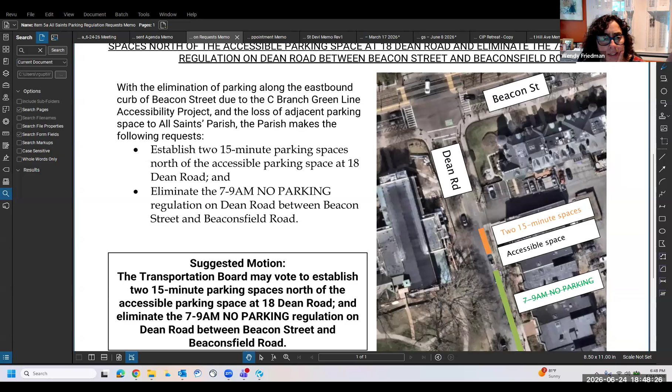I mean, I just know this is like a real, so right where you're proposing, it's still one lane. It's south of when the turn lane starts. Correct, yeah, and we're proposing the 7 to 9 a.m. no parking. It comes down here to Beaconsfield Road, and this is where we would propose that prohibition is just, it ends, because that's only where it exists.

I mean, I think if you haven't, and it sounds like you haven't, somebody should probably go look at that area in this time frame before we remove something. Thank you, Wendy. Richard, go ahead please.

Two questions. Did we consider the two 15-minute parking spots before the accessible parking location, making sure that we have two lanes of traffic into that intersection? And then, do we have any daytime parking permits for these abutters along here that have permission to park there all day with the permits, if they have it?

To your first point, Richard, I'm pretty sure that where it's marked as two 15-minute spaces, that is just parking today. So cars do park there today.

Well yeah, okay. I don't think there's any permits on this neighborhood for the Runkle School, and looking on Street View, it doesn't look like it. Maybe some resident permits, but we didn't check how many are issued. But right, do those resident permits allow parking between 7 and 9? It would not. Yeah, I didn't think so.

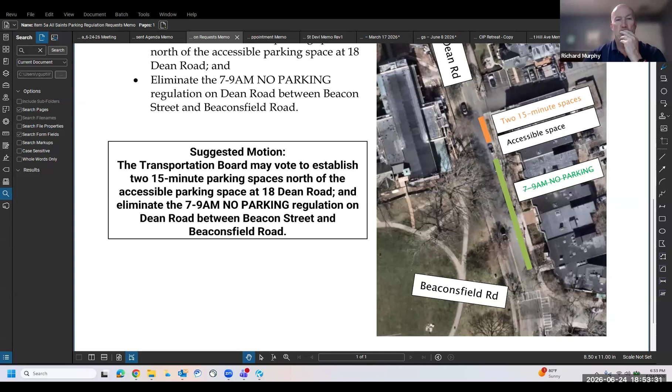Okay, but I think that if we were - I'm just answering Wendy's question. I thought you said to the contrary before. Let's pull up the street view so everybody can see the same image. Thank you, Dan, good idea. Have it ready - then I had a different comment, Brian. We'll get back to you, Jesse. Don't worry, yeah, I was just answering Wendy's question. I appreciate that.

Sure, this is the street view. This is the accessible space we're talking about here. And this is where the two 15-minute spaces would be. And then this is the no parking here to corner. So this is where we're proposing the two 15-minute spaces - so they're not new spaces. And then the 7 to 9 restriction is after the accessible parking, so these two are already in place as parking in the morning.

Okay, Jesse, why don't you go ahead, please? Yeah, I just wanted to follow up on your comment, Brian. As a resident south of there who travels that way quite frequently, the confluence of it - if it was to be allowed to park between 7 and 9, which would fill up basically with people commuting as well - then that conflated with the no turn on red that stops people from being able to drain off. The backup, as you say, today when it gets the worst, it's been up to Fisher Avenue in the morning.

And also keep in mind that there's a police officer directing traffic at Clinton and Dean from around 7:15 till 8 o'clock. He'll allow more cars to go through until they back up past Clark and then wait. But those cars can't move for a long period of time, because once there are 4 to 5 cars in the center lane of Dean approaching north to the light, any cars parked on the right-hand side block anyone from being able to get into the no turn on red lane.

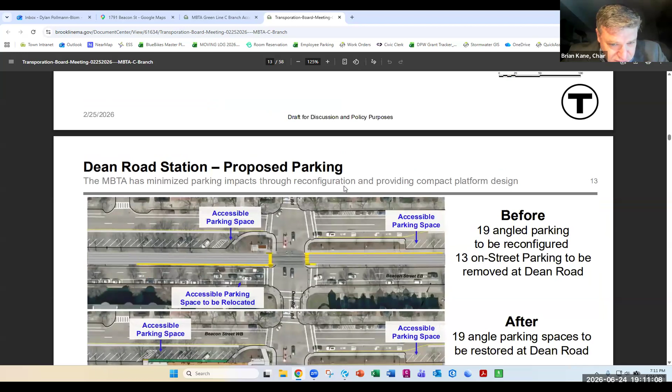Is this the one we're looking at? Yeah, this is what's approved. So the parking in front of the station there had to be removed to widen the platform. Okay, so long-term, there'll be an accessible spot put on Beacon eastbound on the far side of Dean, going inbound.

And then another one on the other side of the street, probably won't help too much. Looks like - is that little blue car thing the furthest spot back on Beacon headed towards Cleveland Circle, or is that... Probably the first white car that's parked, Brian. If not that, the second. 1791 Beacon? Okay, how far back is that? Probably right where it says 2026 in the corner. Okay.

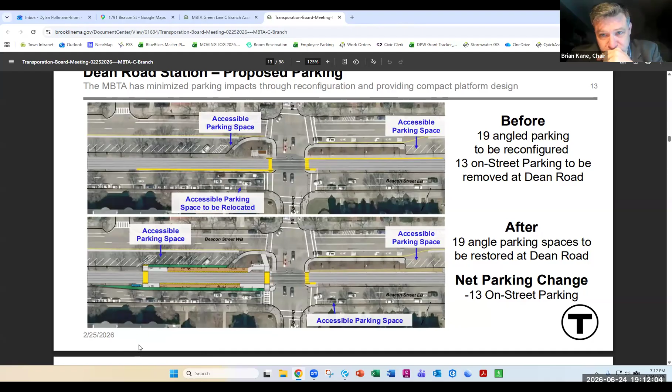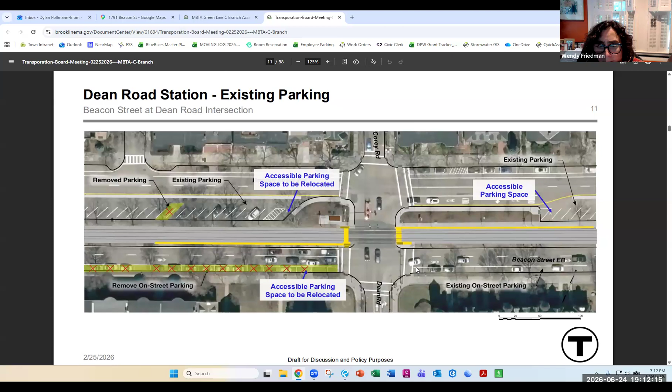Can you go back up to the before slide again? So it's one space that's moved over? And then lost - this one was here and it's going to be moved over here in the final condition. And the accessible space in front was shifted to the far side of the intersection, shifted over here. Okay, and then all those other spaces are lost. Got it.

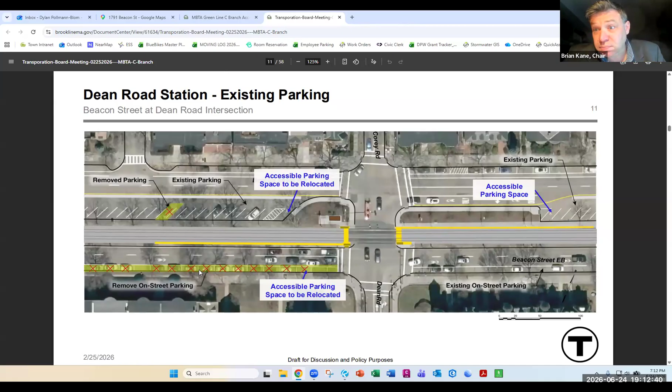So Reverend, or Roberta, I hate to put you on the spot, but can you put that back up? Dylan, trying to find a good compromise here. Would the 15-minute spots on Beacon Street, in front of where that new accessible spot would be, help at least for the short term while we figure out a longer term solution?

I'm not sure which accessible spot you're referring to. Right where that cursor is, on the far side of Dean Road on Beacon Street going inbound, at the bottom of the page. I think if that works better for you all, it's essentially the same as having the loading zone 15-minute on Dean Road. But if this helps with traffic flow on Dean Road, people will still have to cross Dean in order to get things to the church.

My concerns, Reverend, are that I think we have a little more homework to do on this. I want to find a short-term solution that might at least mitigate some of the effects for you folks over the summer. I hear how busy your building is, and I honestly didn't know it was that busy. So congrats on running an awesome program or series of programs.

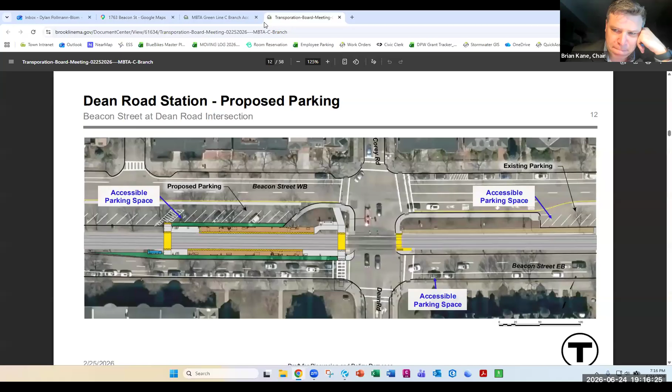That's not a bad idea. Dan, we've already approved the accessible spot at that location, I think by virtue of our vote on the MBTA thing. So do we know if that's in place yet or not? The MBTA is working on installing it. They haven't done it yet. So it's not installed yet?

Not yet. Okay, so in the interim, theoretically, could you go out there with temporary signage and make it accessible to help these folks out? Yes, we can. We're also trying to get a concrete pad installed as part of that work, but we can get the signs in sooner.

Well, I think hearing from the folks that are in the building, I think we owe them a little mitigation at the very least in the short term. So if we could put even just a stanchion out there with a temporary accessible spot, I think that would at least help. But anyway, Lisa, please go ahead.

Thank you. And again, I'm encouraged to hear you all thinking creatively about what can be done. I also just wanted to note that recently concrete pads were poured apparently for a Blue Bike station to be installed right in front of the church, in front of the walkways between the rectory and the front of the church, which is concerning because even if people come up and put their hazards on to unload, they won't be able to do curbside because the blue bikes will be there.

And I did take a look at the Blue Bike expansion plan and saw that other spaces had been identified, including the area where you're talking about now, where the mailbox is, as well as up at... I'm sorry, it begins with E, I'm forgetting the name of the street, but just a block away.

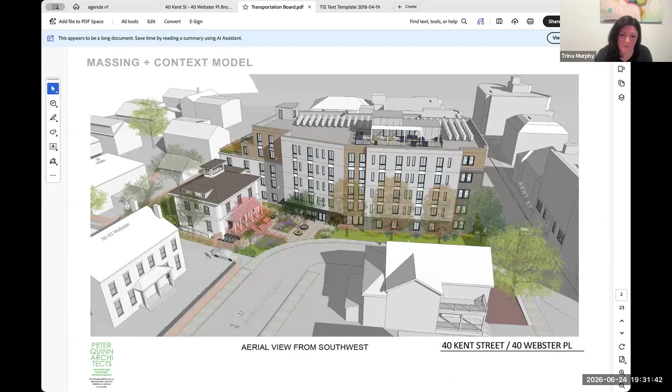I'm going to jump into some quick massing models to give you a visual. Again, we have Kent Street here, Webster Place rounding the corner. This is the relocated 40 Kent Street building we're preserving and the new 5-story structure. This is the shared courtyard between these two buildings. This is the main entrance for this building, and this is the main entrance for the 40 Kent building. There is an underground garage running beneath both structures, with the only entry point off Kent Street.

The project has 116 residential units. It's a fully residential building, fully residential project. It has 23 below-grade parking spaces, 3 motorcycle spaces, and 131 residential bike spaces. There is also additional guest bike parking on the exterior that Katya will run through.

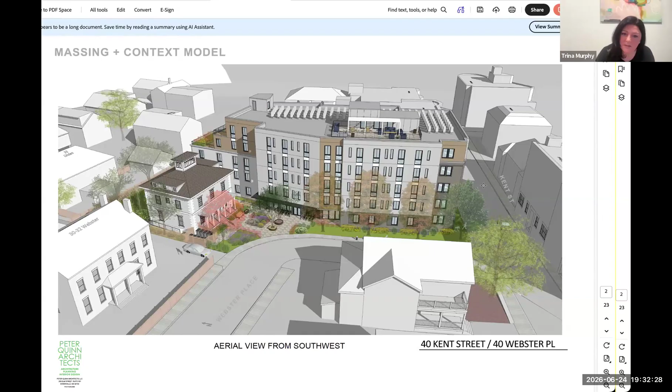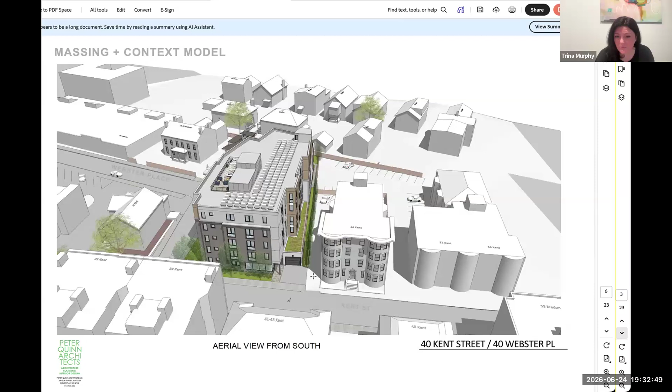Let me click through so you can see the different elevations and angles of the building. This is the rear facing Linden. This is the Kent Street elevation, where you'll see the garage entry—a signaled ramp. This is the only entry and exit of the garage.

Just a close-up of that. You'll also see here the entry for the trash room. We have a below-grade trash room where trash is carried up through a lift through this area, and it will be picked up through private collection.

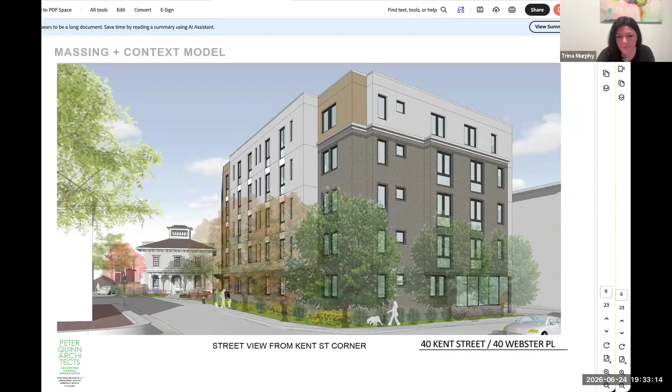Here is a view from Kent Street looking down Webster Place, a nice pretty view of the preserved building. And again, just another view of the joint entries. Very quickly, just to run through, this is the main entry.

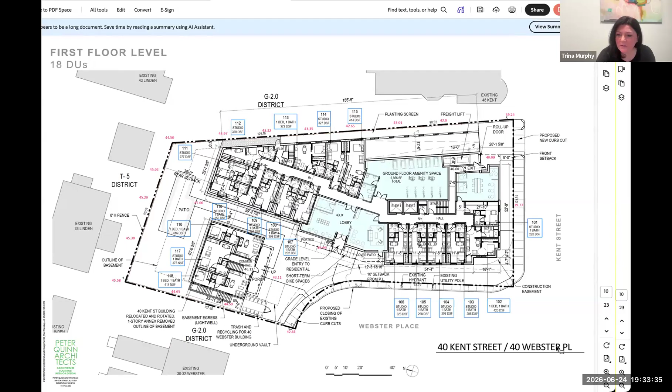We're coming to the lobby, where mail deliveries, package pickup, et cetera, will be. Here is where that lift I mentioned for the garage trash pickup is located. This is just a close-up showing the lobby area where all that traffic will be.

This is the below-grade garage, with the 23 parking spaces. We will have electric vehicle charging stations as required. We have handicap parking as well, 3 motorcycle spaces, and you can see all the bike parking, including electric bike spaces.

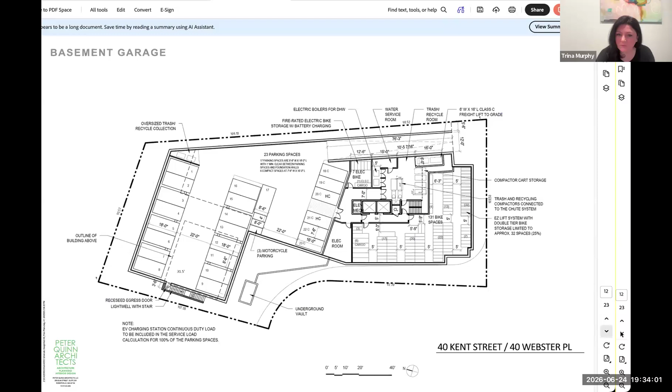And then quickly clicking through the residential floors, we do have a roof deck, and these are just more elevations. With that, I'm going to hand it over to Katya. She's going to talk about the site plan and the streetscape, some of the details we're all more focused on tonight. Thank you.

Thanks, everybody. Can you all hear me? My name is Katya Posadlo, Verdant Landscape Architecture. So what you're looking at is the landscape plan. Kent Street is along the right-hand side, and Webster Place wraps around the corner there. If you were to drive that direction, you'd get to the corner at Starbucks and Henry Bears Park and that zone along Harvard.

So I'll run through this quickly so we can get to your comments in the traffic engineer's review. We're proposing a variety of transportation-related improvements represented on this plan.

First, let me point out that the primary pedestrian entries to the residences are located off of that central unit paved plaza, which is at the elbow of Webster Place, where the road bends.

The garage entry, as Trina described, is located off of Kent Street. It will be signaled so that, although I can't remember the exact width, it's not a two-way - two cars won't be passing on that ramp at the same time. For those 23 car parking spaces, there'll be a signal to tell you it's okay to go up or okay to go down.

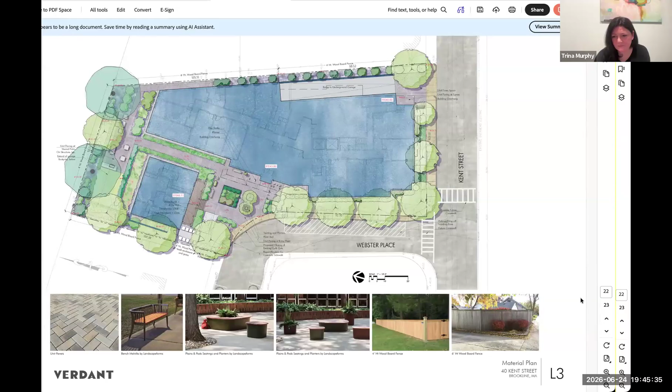Go ahead, Len. I think I counted 8 cargo bike spaces. How many are required, and is 8 the right number to count? We are compliant with the project. We have exactly what is required. I can jump to that slide. So we have our 8, we're fully compliant. Okay, thank you.

Of course, Wendy go ahead. I thought I had read, maybe I was looking at old plans earlier, that the driveway was 2-way. Was that a change, that it's 1-way? It's 2-way, it's a signaled ramp, so they will go in and out through that same passage. Oh I see, but they can't pass each other simultaneously. At the same time, yeah. So it's signaled on both sides to keep them down below and keep them up top. Got it, okay, thanks.

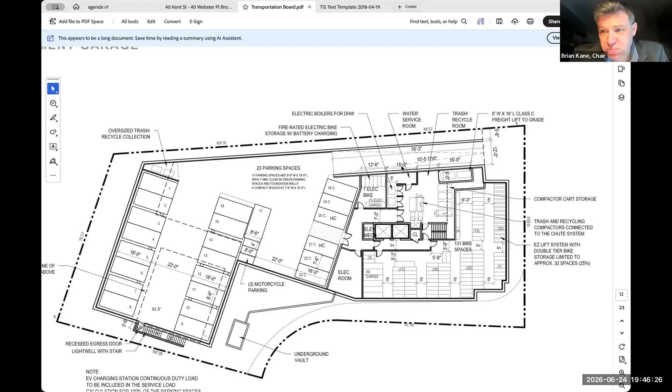Okay, and the meters. Trina, I was going to say the meters are almost perfectly positioned at the midpoint of the proposed crosswalk. I just wanted to point out there are 2 meters, they're permit parking only, so they're for commercial hang tag users. There's the lot right near here that's also available, and the meters for the permit parking extend from Kent to Station, and a little further down Kent, and then there were meters approved for Webster Place opposite this loading zone. Those won't be able to be installed anymore, and we weren't able to put them in because the wall was falling over and we couldn't fit the parking meters.

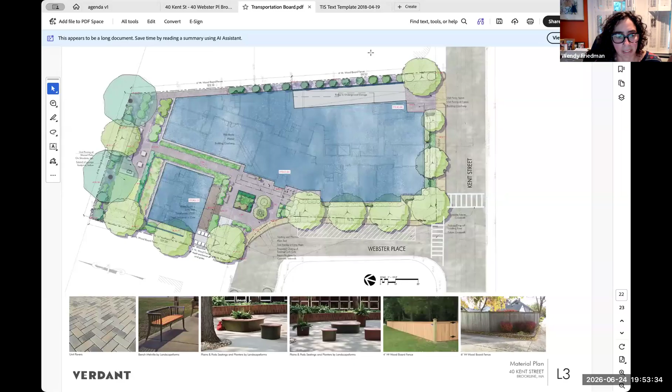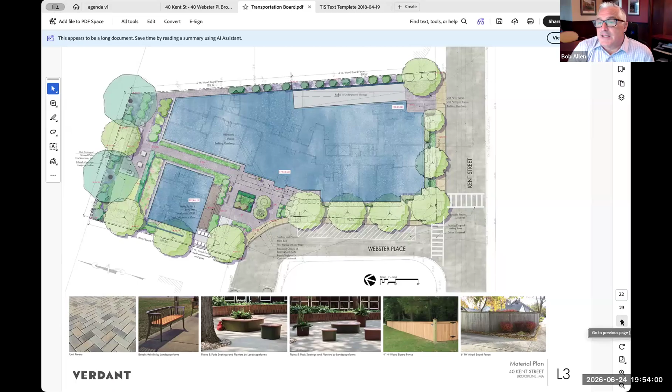I can tell you what they said during the hearing - behind Starbucks, there's the town lot there, and you can take a left out of there, so it's only two ways kind of from that point on. People think it's confusing, and currently UPS parks right up on the sidewalk there next to Henry Bear, so it gets difficult. It's been their concern, and they were talking about coming to the transportation board to discuss it at a future time.

And I can't remember, in that lot can you also exit onto Kent, or only onto Webster? You can go onto Kent, take a right of course. But if you go the other way, you beat the light, you don't have to wait for it. Is there value in putting a 'do not enter' somewhere on Webster in front of the Boston Vision, maybe?

I just want to comment. The only feedback I've received before this project on Webster Place was a complaint that the two-way went to the elbow, and they were upset. I think they had gotten a ticket for what they felt was improper ticketing because they said it had to go to the elbow. We did look into the regulations, and the two-way does go to the elbow, and we did put in signage indicating that. So I do think changing that could be constructive because the road is too narrow for two-way traffic, and you kind of have to go in between the parked cars if there are two ways there.

But I would keep that separate from this development. I think we could bring that back to the board as an item. Oh, yeah, definitely not part of this, but yeah, you park on both sides of the roadway. If Coca-Cola parks there, they need loading. It should be a one-way, something we look at to do, but not tonight.

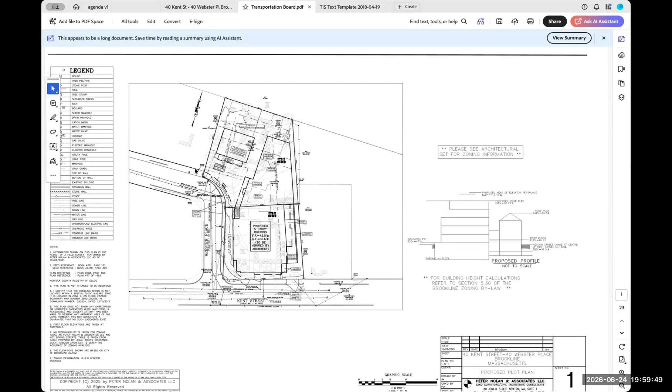Thank you. Thank you very much. Any other comments from the public or transportation board members?

Just following up on Jane's public comment, Richard. Engineering should add to the list that there's a do-not-enter sign at the corner of Kent and Webster, but the opposite corner does not have one, so they should reinforce that one-way street.

Thank you very much. If there are no other comments, I think we've made some changes that will be incorporated, correct, Dan? With that, I think the suggested motion is to authorize me to provide a letter to the ZBA outlining the details of the questions, concerns, and recommendations of the board for the proposed 40 Kent Street development as we discussed tonight.

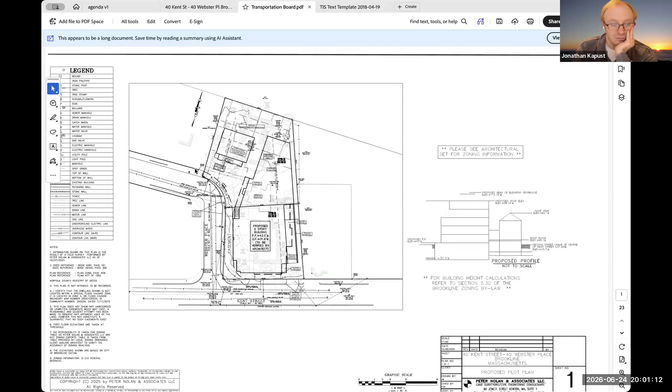Is there a motion to that effect? So moved. Second. Thank you. Is there a second? Second. Thank you. Call the roll, please.

Can someone call the roll, please? Brian, yes. I'm a yes. Nancy, yes. Wendy, yes. Richard, yes. Jonathan, yes. That's unanimous. Thank you all. Thanks everybody, good luck with the project.

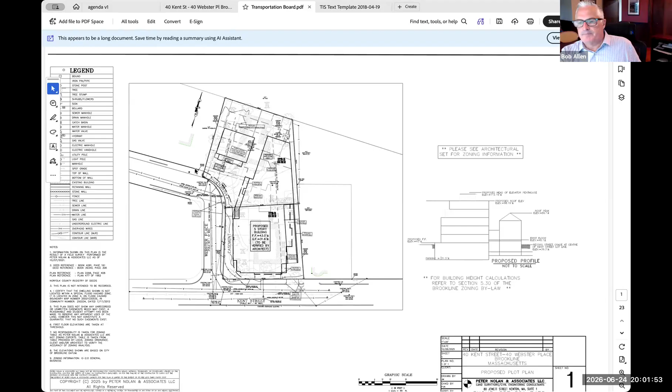We will move on to 5D, discussion on the CIP priority discussion from our retreat.

I just want to say a quick word before I turn this over to Rob. I thought it was a great retreat. Really looking forward to working with you and the subcommittees on regular milestones for all the capital improvement projects, getting full information out to everybody, and a good review so everyone's on the same page.

Thanks, Dan. As was mentioned at last week's Transportation Board meeting, we had our retreat the Friday prior, from 9 a.m. to 2 p.m. at the Brookline Teen Center. You can see the list of attendees: representatives from DPW, Transportation Board members, advisory committee members, town members, and two consultants who helped facilitate the day.

Quick summary of the purpose of the retreat: it was intended to help provide the Transportation Board and others with a clearer understanding of the town's adopted transportation policies, how those policies work together, the roles and responsibilities of the Transportation Board and the Public Works Department, and how we all work together to set the capital improvement plan and its priorities.

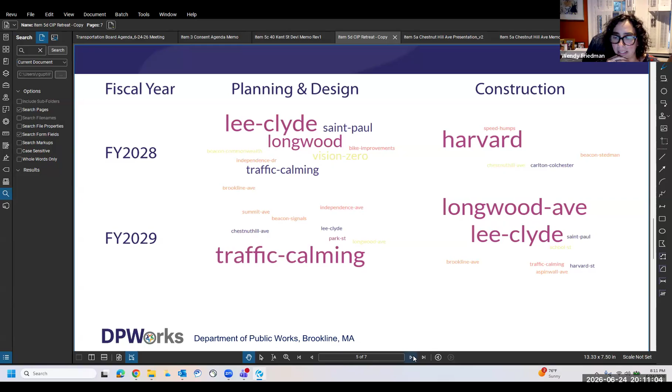I believe the three listed in the first three bullets—Lee and Clyde, Longwood Avenue, and programmatic safety improvements—the metric was that they were mentioned by every group. Anything listed in the second group are streets and programs mentioned by less than the totality of all groups.

Oh, I see, so the size of the font is not quite representative. It's not relative—it depends on the number of words mentioned in each word cloud. Okay, thanks. Yeah, we spent a lot of time talking about Harvard Street. You're right, Wendy. David, let's hear from you, and then we'll hear from Richard.

Hi, David Trevette, Chair of Pedestrian Advisory Committee, and a participant in that retreat. The same thing I said before, at that retreat and other places, let's always be careful about overinterpretation of limited data that was not necessarily designed to produce what it's being interpreted as having produced.

As I said at the meeting, at no point did we say here are the 10 projects that have been essentially suggested to everybody in the room. Now decide how you would lay that out across 5 years of work or 5 years of CIP.

It's perfectly reasonable that if each table is asked to come up with just a few top projects, well, why would you, if these are our most important 3 projects, want to slate them out at 2031 when we don't know what any other table is producing?

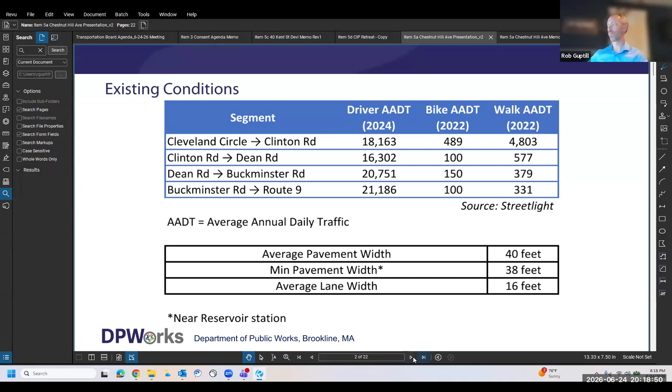No parking, various regulations that are throughout this corridor. So those are all details that would need to be assessed as part of any further study upon what the plan is for Chestnut Hill Avenue.

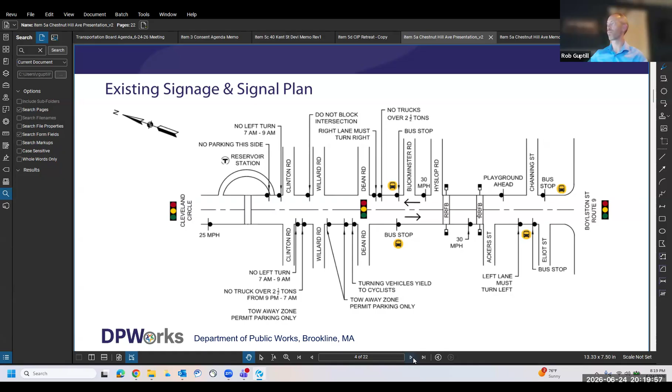There are several sidewalk improvements that DPW staff have proposed at various times. These include pedestrian refuge islands and RRFBs, the rapid rectangular flashing beacons, one of which is being proposed for the existing Reservoir Station crosswalk. Very close to that is a new crosswalk proposed at Clinton Road with pedestrian refuge islands, a bump out, and an RRFB.

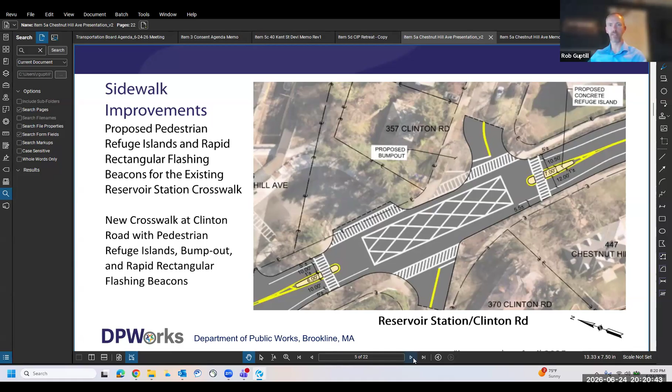One of the designs that was presented is shown here, but there are other designs. As we move forward in this process, we would certainly work with the Transportation Board to finalize the final design at this and other locations.

Various sidewalk improvements include new crosswalks with pedestrian refuge islands and RRFBs at Buckminster Road and Hyslop Road. Also, these refuge islands and RRFBs were proposed for Ackers Street and at Eliot Street and Channing Street.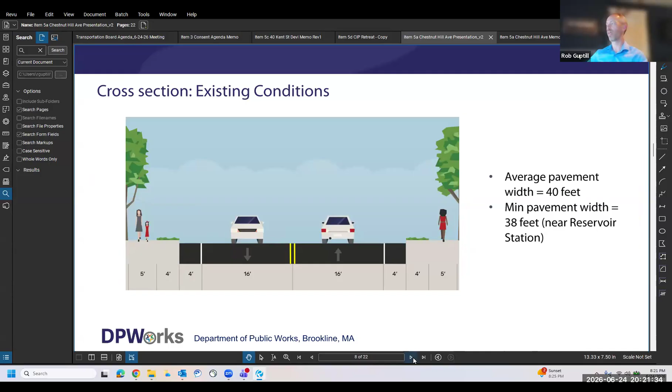I'm going to go into some cross sections right now. This right here presents the existing conditions: the average 40-foot pavement width. You see here the 16-foot travel lane widths and the 40-foot width of the roadway, with a 4-foot shoulder.

Concept A that was advanced was to put protected bike lanes in both directions, protected with flex posts. This would narrow the travel lanes to 10.5 feet and eliminate parking on both sides of the roadway.

Concept B widened the shoulder and had travel lanes narrowed to 12-foot travel lanes. The shoulder could be totally parking, or it could be shared with, or could become bike accommodations there, but we need to figure out exactly how bikes and parkers would work together; it is the width of a standard parking lane.

Concept C essentially keeps the narrow travel lanes and then has shared bike lanes and/or intermittent parking again. This shows how the bike lanes could work when you didn't have parking.

Concept D is kind of a mixture — it does provide bike lanes in both directions. On one side, it's a narrow bike lane at 4.5 feet and a narrow buffer at 2 feet with a flex post, making it a parking protected bike lane. On the other side, you would have a travel lane, and the bike lane would be between the travel lane and the curb, maintaining parking on one side of the roadway and bike lanes in both directions.

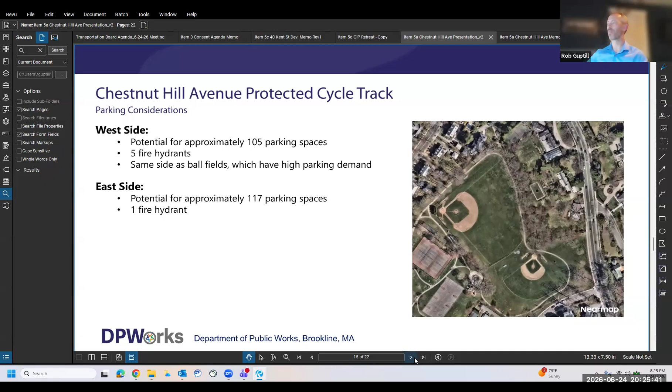Some other considerations: whether to put parking-protected bike lanes on the same side as parking, or put parking-protected bike lanes and parking on different sides of the roadway. Putting them on the same side as parking, some benefits would be more protection for bicyclists. It does mean people would have to cross the cycle track to enter and exit the parking lane.

And the opposite sidewalk, the one without either the cycle track or the parking, would be directly adjacent to moving traffic. If you had parking on the same side as the two-way cycle track, the parking lane would be replaced by a floating island for bus platforms. In terms of the bus service along here, if you didn't have parking on the same side as the cycle track, it would create what the MBTA calls a constrained bus stop, where passengers would be boarding and alighting in not just a bike lane, but a two-way bike lane. That certainly is a concern.

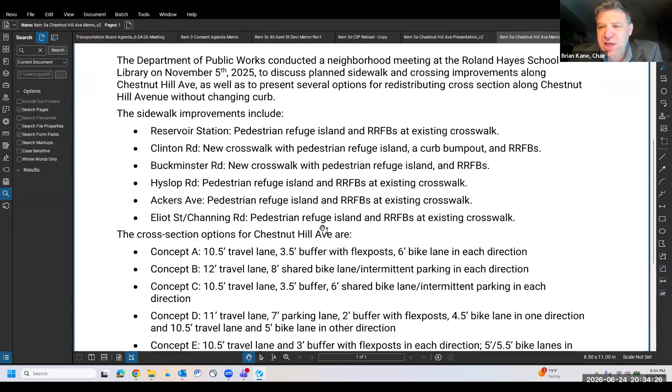Okay, so can we put, can you show on the screen the memo that's attached to this item, please? Yeah, and scroll down. So, okay, right there. So, I guess I want to just briefly talk about the sidewalk improvements amongst the board.

Just so we're all clear, pedestrian refuge island and RRFBs at the existing crosswalk at the station, new crosswalk at Clinton Road, and there's diagrams of all of this in the attachments that we all received. So these items have been discussed.

So Dan, are these more like ready to go if we give you the nod, or where are the sidewalk things? Depending on, there are some things to think about. If this is a two-way cycle track, we'd have to think about the islands themselves and adjusting them to make sure they fit. It's a little tricky because without other options, unless we did something without the islands and just did the crossings themselves. The islands are a piece, but we'd need to think about what comes later, we'd hate to put something in and then have to change it based on a later decision because of the width of things and where things are going in the layout.

Okay, it's all related. And I do want to note that we received feedback from the fire department about the proposal at Clinton Road, and you guys shared the auto turn drawings, and it looks like, was that Ladder 1 or Quint 1 that can make the turn safely? I believe that's what they showed. We could take a second look, but that was the intent.

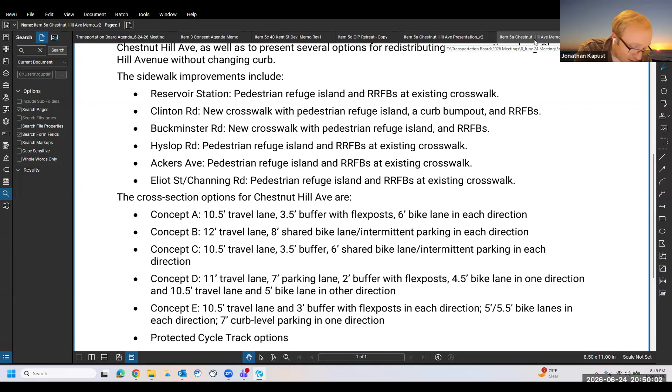So in regards to the protected cycle track options, I think they are a great idea in the long term. I don't want to discount anyone's feelings towards them, they make a lot of sense for this particular roadway in the long term. I think there are logistical reasons why trying to do something like this in the short term, particularly because of traffic signals, but also because of how it ties into Chestnut Hill Avenue and Route 9, will make this very difficult and will add additional cost to the project.

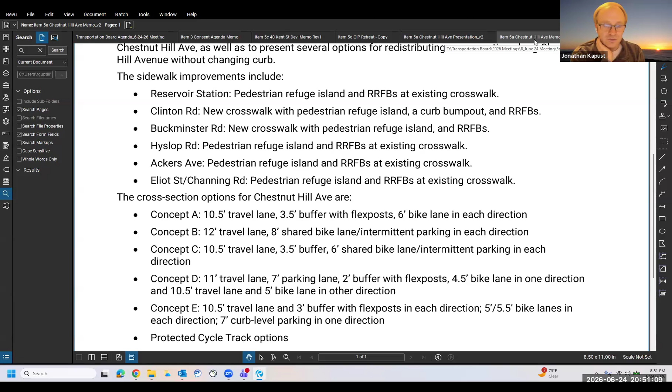After that, I think concept C, not saying it should be the one, but I find the idea of it to be kind of an interesting experiment in the sense that it will help us really determine what kind of parking is really occurring out there for the long term. So just the thought there on that. Okay, that's it, thank you.

Wendy. So I guess to voice my preference, I really like the two-way cycle track. I understand what Jonathan's saying about the complication with the signals, particularly at Route 9.

Can you go back to that Boylston Street diagram? Yeah, I don't really understand the red one, given that it puts a crossing, like if that's a cyclist going over, they're on the wrong side, they're going against traffic when they cross. So I don't really understand what happens. I guess you cross at the light there and come back to the other side of Lee Street, but that doesn't seem like, I don't really understand that crossing, I guess.

Having said that, I guess my initial reaction is, other than this, I like the idea of the two-way track being on the northbound/east side of the street. And that's because with the parking on the other side, and that's mostly because of the ball field and being concerned that people are pulling up and parking at the ball field, kids get out of the car and then they have to get across the street. And can you actually go to that area so we can see what the pedestrian crossings are there?

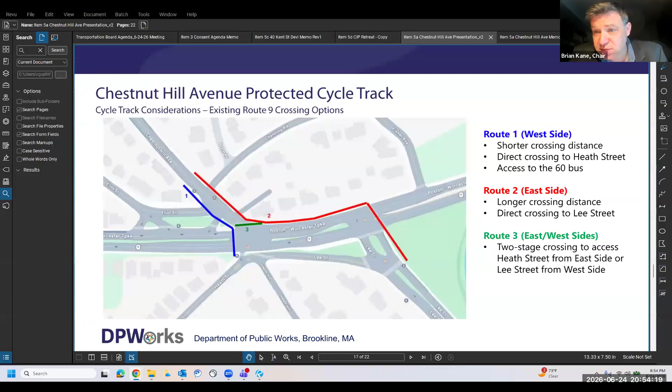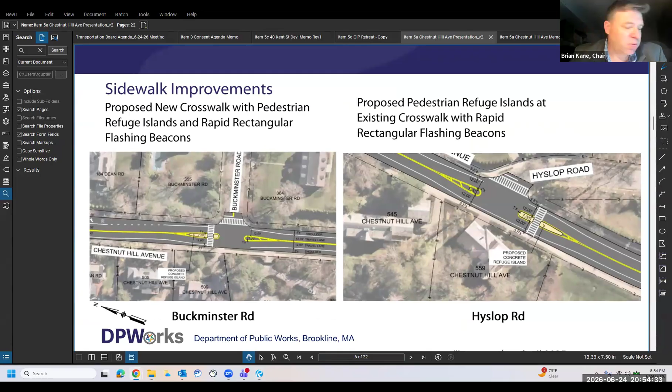But Wendy, I want to get the right visual up. Rob, can you put up the deck and go to slide 6? I think this is what you were looking for, Wendy, what the plans are. So this is Hyslop field, right? Go down, Rob, go to slide 7.

So Hyslop is near the ball field. Right, so any parking that's north of that crosswalk, people are probably going to be running across the street. So I guess my first point is I really like the two-way cycle track. That would be my preferred design, with parking on the opposite side. Because of this, my preference would be for the cycle track to be on the northbound side.

Okay, thank you. And I'll just say one more thing, if I can. In terms of, yeah, I guess I'm not convinced by the need or the benefit of the parking-protected bike lane.

If there's going to be flex posts, and potentially a raised divider, which I think would be great—it's a wide area, so it shouldn't be a problem for snow removal, so we can do things to protect that—I don't think it needs the added protection of parking. As Nancy said, it increases the conflict with people getting out of their cars, but also this crossing of pedestrians becomes a much longer crossing across both car and two-way cycle track. And also we'd have to design for sight lines for cyclists to be seen by cars turning across the cycle track. So I don't see anything that's convincing or compelling about having them on the same side of the street.

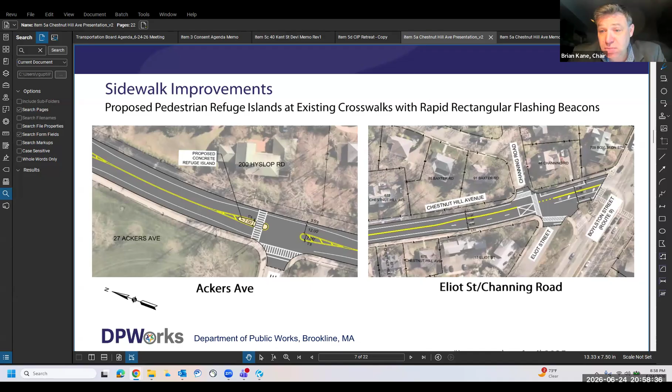All right, Richard, second time, Richard, then we've got to hear from the public. Did you lower your hand, Richard, or did you want to say something?

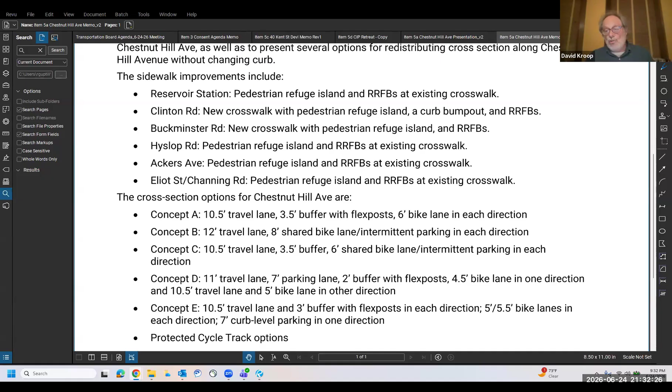My final point is I hope you'll consider there could be different solutions for different parts of the street, even at Warren Field, where there are no trees in the tree pit. You could maybe create a temporary type of parking lane right in the tree pit so people could park on that side, but you'd still have enough room for the bike lane.

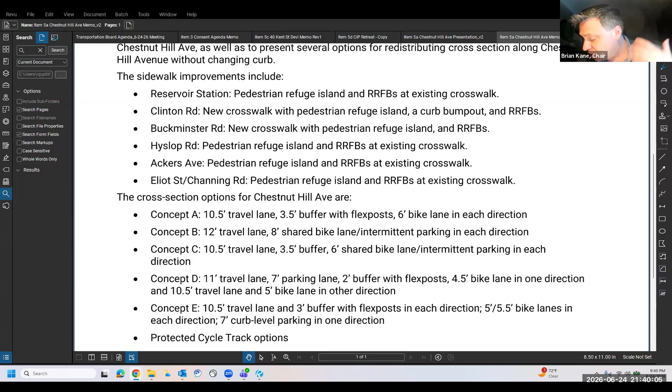But it's not efficient or smart for us to tell the designers to go design 12 concepts. Yes, this is an iterative process. We're not going to have everything fully baked to bring to everybody all the time. We're going to do the best we can and iterate based on the feedback we're getting, which is what we've done throughout this process. I often hear folks that don't like... well, anyway, I'll leave it at that.

Let's turn back to the transportation board. My colleagues, if they're still with us, which I hope they are, we are asked to narrow some of these options down, understanding that the options we move forward will affect potential pedestrian treatments as well.

I liked hearing about alternating treatments based on the side of the road. I think our designers are pretty smart and can figure that out. So I'd like to suggest - here's what I think we should do, and I'm open to suggestions from my transportation board colleagues - I think we should select a cycle track option and a concept A through E option to be considered, and then run those through the proverbial hopper to see what the effect would be on these pedestrian treatments.

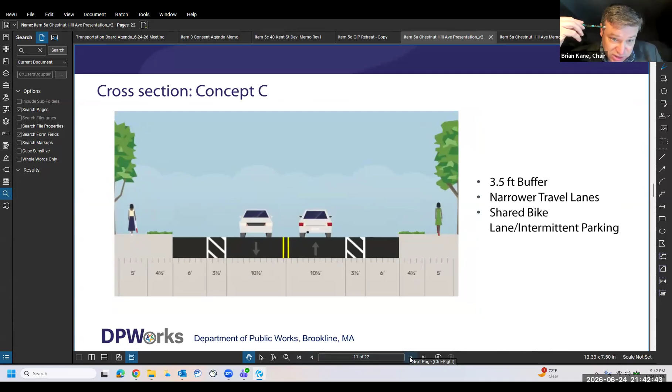Let's go through them all again real quick. So go up to A. This is A - flex posts. B, no flex posts. C, no flex post, but a buffer. D, flex post, but in 5-foot and 4.5-foot lanes. And E is parking on the grass on the left there. Okay, Nancy, I see your hand.

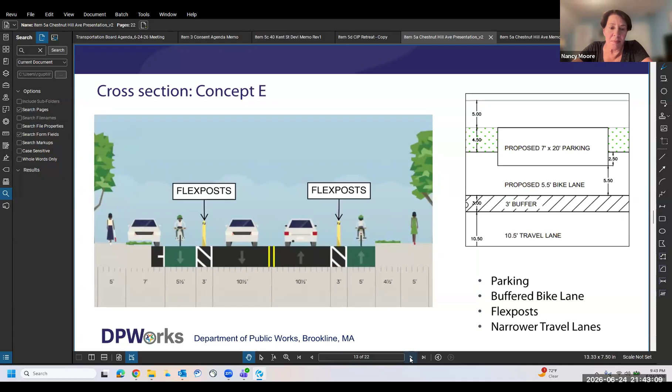Go ahead, please. I would like to eliminate A, no parking. Can we see A, please? That was very game show of you, Brian.

All right, Nancy, do me a favor, lower your hand. Does any board member object to eliminating A? Len, go ahead. I prefer A out of the lettered options. You prefer A. Okay, so there's one for A.

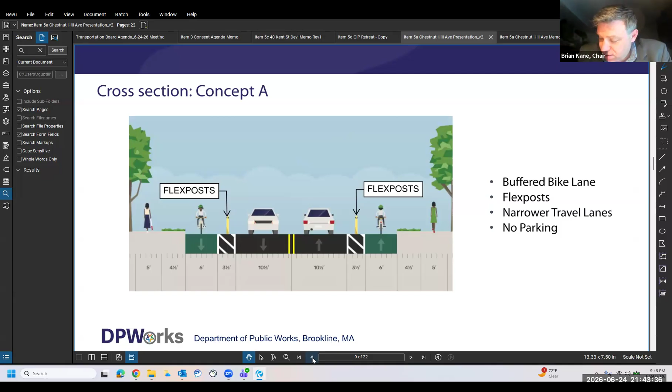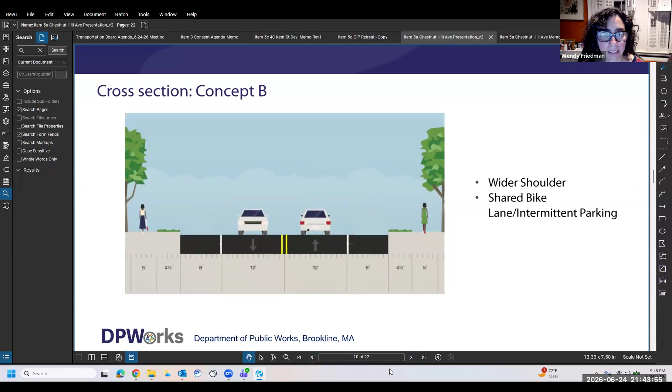Okay, option B. Can I ask a question? Yeah, sure. So A and D - you suggested eliminating D, and Nancy suggested eliminating A, if I have that right. So A and D, the difference is - can you go back to D? Is there a slide that has all of these? I thought there was. Thank you, oh yeah, thank you. Ah, thank you, makes too much sense.

Oh, I see, it has a... D, it does have 4.5-foot and 5-foot lanes with parking. Okay, so the only reason there's no flex post on the northbound side in D is because you can't put them with 5-foot bike lanes for the snow clearance, and that width is taken up by the parking lane in option D. Remember, this also has a bus route and it's a 10.5-foot lane.

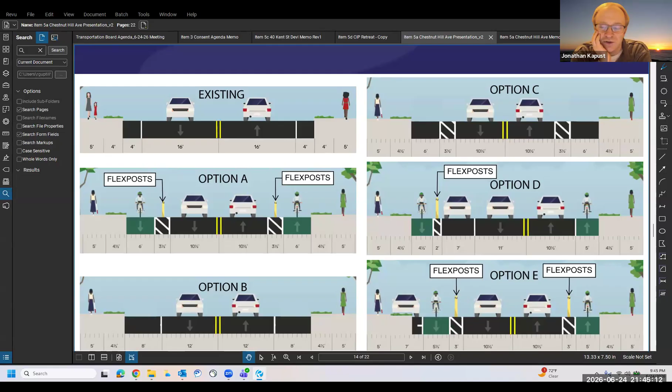So putting a bollard or flex post on that shoulder line is really asking a lot. I know we talked on Harvard Street about how professional our T drivers are, but you're really asking a lot of them to shy away from that. But you have flex posts on one side. So okay, I was just trying to understand what the difference is across these.

So for A, you're doing flex posts on both sides and it's symmetric - there's no parking, bike lanes are the same size and car lanes are the same size on both sides. D, you have one side parking and then a smaller protected bike lane, which means no snow removal there, and then a larger unprotected bike lane.

Should we look at it in two pieces, like Wallingfield to Route 9? That would involve parking. Can we just do one, please? We have to give our designers some guidelines, and one will be to look at it in two pieces, but we can't give them 12 things to look at in two pieces because that's 24 studies. We need to narrow this down.

All right, we're going to have to vote on each individual option. Unless Wendy, you have something again? Is your hand still up? Sorry, it's the same, but I'll just voice my opinion.

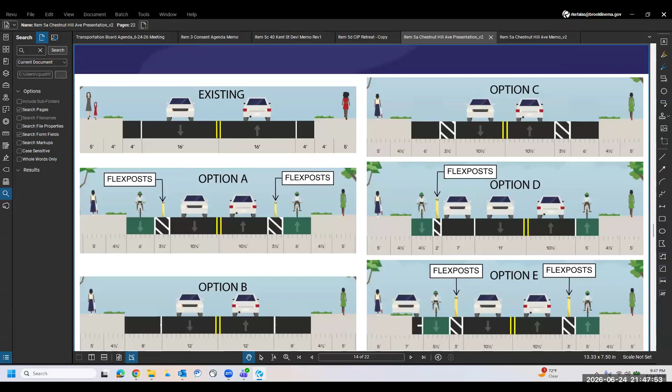Point of order. Well, maybe the staff can speak to it. Maybe public comment is closed. It's the staff, Dan, will you speak? He's already spoken twice. If I could talk, David, sorry, you just can't talk right now.

Yeah, so David, Peter Firth, David and I sat down, and Peter kind of suggested E as a way to get parking. It's a little tricky because the car has to cross the bike lane, but it was a thought he had, and that's the genesis of where that one came from, to try and satisfy everybody.

Okay, thank you. Transportation Board, let's just go through and vote on every one of them, Brian. Who wants to advance, raise your hand, if I may.

Raise your hand if you want to advance option A. I think that was you, Len. Okay, so we're voting 2 for only A. We can select only one of these.

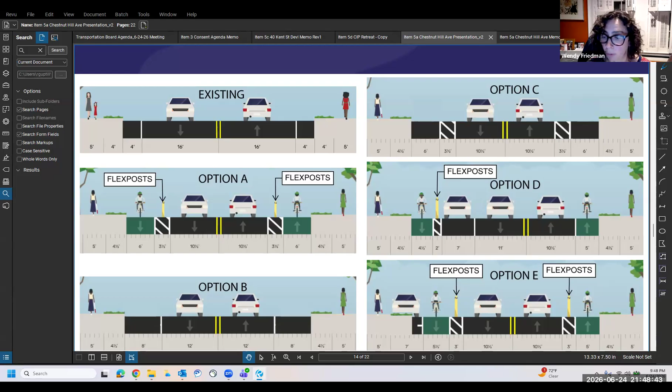Is that of this group? No, you can vote on as many as you want. You can select 1 or 2. Yeah, you can pick as many as you want. There's no limit. Oh, yeah, you're going to pick Option B.

I'll vote on A also. Anybody want B? I would like to vote on A. Well, you can't vote on all of them.

You can't vote on all of them. You have to not vote for one. That's why I asked. How about if I just give you my top 3 overall?

No, we're going to do it this way. So we have 3 for A. How many for B? 2 for B. How many for C? 2 for C. Richard, are you going to vote for them all?

No, hold on, sorry, my hand wasn't up. My hand was only up for A. Yeah, me too. So there's none for B. Then you have to do it again.

Okay, everybody put your hands down, just do a voice vote. If you want to advance A, raise your hand. So I see Wendy, Len, and Richard. Okay, put your hands down. If you want to advance option B, raise your hands. Nobody wants B. If you want to advance option C, raise your hands.

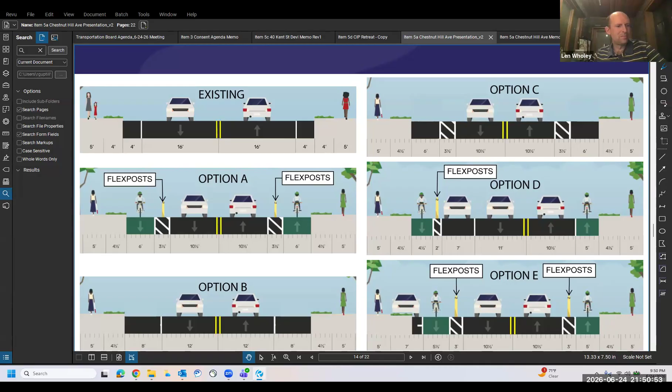Okay, so we're advancing A and D to the next round. Let's look at all the cycle track options. Wait, you only had 3. Okay, all right, fine. One had 3, one had 4.

Dan, you had a question? This includes the cycle track though, right? So we're gonna do that next because there's multiple cycle track stuff now. So you're asking staff to do how many, 2 non-cycle track and 1 or 2 cycle track?

Okay, so there's 4 options for cycle tracks as I see it. I don't feel strongly on any of these and would be happy with just about any, if that's helpful. Okay, not helpful.

I suggest the southbound side. I know there are parking concerns for the ball fields and such, but it makes the most sense for continuity.

What is it we're choosing here? So would you prefer to have the track itself on the southbound side or the northbound side, also known as east and west? The west side is the side the school and the ball field is on. My only concern is that it should be on the opposite side as parking.

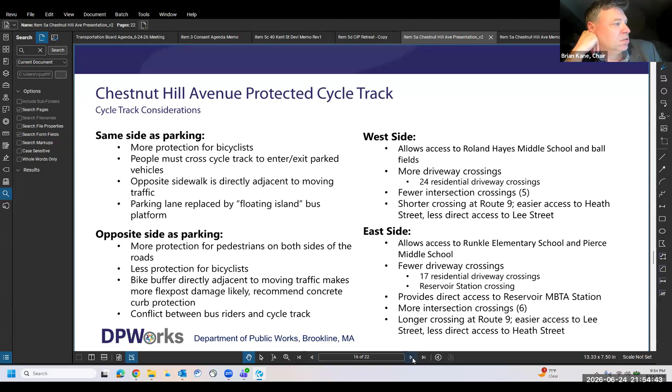Okay, Rob, go back up to the first one, please. I will say that my preference is for one down. My preference is for the cycle track to be on the west side because that's the side the school and the baseball field are on. I am relatively agnostic as to where the parking goes, and that's sort of where I'm at.

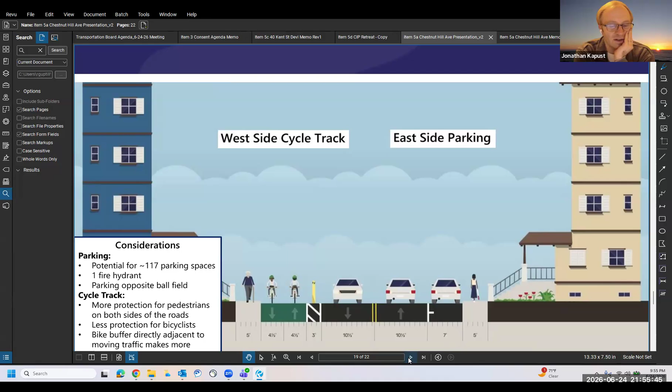I agree with you, Brian, on the side. I am very much in favor of having the parking next to the path because it provides what appears to be a 10-foot buffer between the two modes of transportation, which means if you were turning into a driveway or turning into a signalized intersection or a side street, you have the ability to pause and see someone.

Let's say you were making a left across the two-way track - you have the ability to pause and look behind you, because your first concern obviously was that you weren't going to get hit by an oncoming car.

And then if you're making a right, you have the ability to pause and look in front of you as well as behind you before you make that turn. So this particular slide would be my important preference consideration.

There are concerns from pedestrians on the other side being next to speeding motorists, but yes, there's always trade-offs. I recognize that. And last time I checked, there's lots of trees out there between the sidewalk and the roadway, and guardrail for a long distance too. Good point.

So west side, guardrail, and it's a residential road. I'm perfectly fine with this one too, Jonathan.

I'll vote for it. I will go with Jonathan for this one. Me too. I'm opposed to it. Okay.

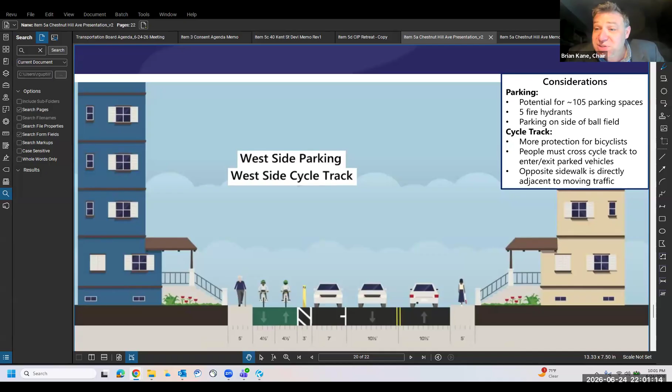It's a decision. Brian, if I mention one other area, is for engineering at the Dean Road intersection, and what is the strong need for that right-hand turn vehicle lane, if we do decide whether it's lanes on either side or the cycle track.